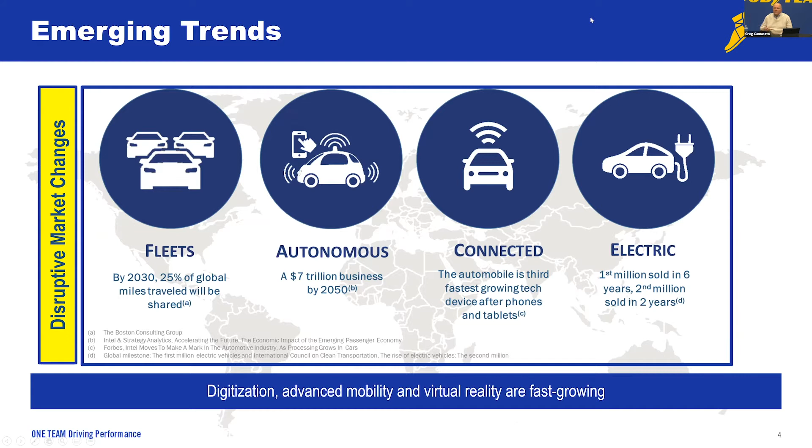Today, expectations and the reality of our development cycles requires us to achieve the necessary performance levels and the ultimate package much more quickly. There are many reasons for that, not the least of which are availability and cost of prototypes, the sharing of prototypes across development areas, and the need to respond quickly to the marketplace. Ultimately, this requires a much more efficient and agile development process than in the past.

So in times of change, in times when inflection points hit, agility is key. The need to be more responsive, be adaptive, and adjust is clear. How we develop tires and the tire vehicle package must change. So now let's take a look at how we are changing. Next slide, please.

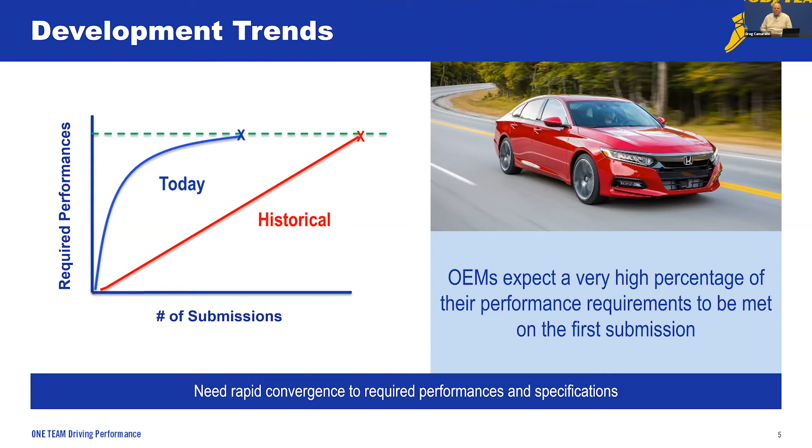In recent years, with the ever-increasing computational power and more accurate models, Goodyear is utilizing vehicle simulation environments and now even full dynamic simulators to assess the total vehicle performance. In the tire development environment, this is a major enhancement to our processes.

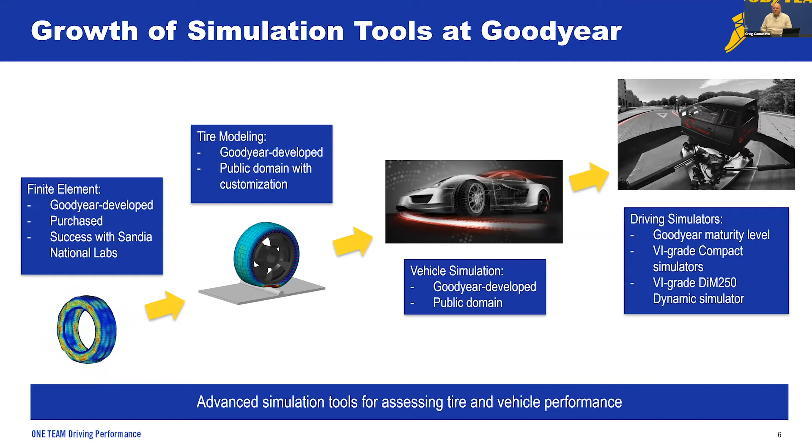So why simulators? First, our OEM customers have models representing their vehicles with a high level of fidelity. Second, through our years of development, we know we have the highest level of fidelity in our tire models. Third, we now have the ability to get a high-level representation of the track with all the physics and connections between the tire and the road.

When you bring all of this together, tires on a vehicle on a real-world track with a human, a professional trained test driver, with the ability to connect the human to the virtual using the math behind the objective representations, along with the driver's subjective evaluation and information, all brought together through vehicle simulators. We believe we are there now.

Drivers and simulator engineers can now evaluate a broader range of design parameters much more efficiently, more repeatably, and certainly much more quickly than with physical prototypes.

Simulation holds many benefits for us and OEMs, now and into the future. Although we will still require our real-world facilities, such as Goodyear's global network of test labs and proving grounds, to help further refine our models and validate the prototypes eventually produced through our virtual iteration process.

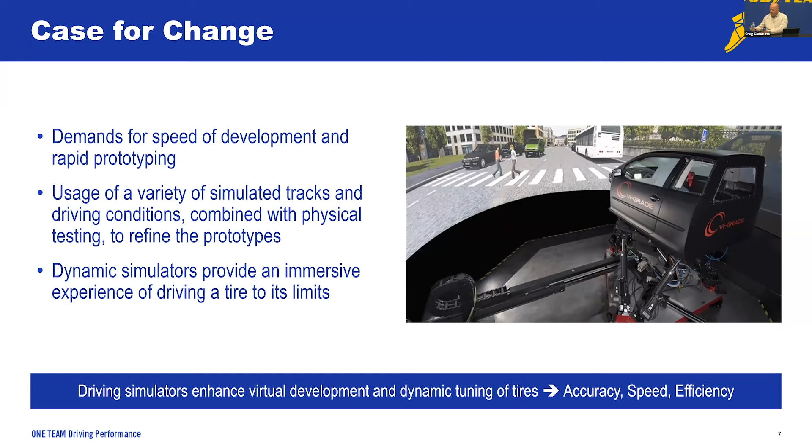In 2019, we established a truly exciting technical partnership with VI-grade. This has led us to multiple driving simulator systems, located in the US and Europe. We're very pleased to have two compact simulators, the first in our Luxembourg Innovation Center and the second in our Akron Center. We'll install compact simulators across our innovation centers.

This is the ideal tool for us to prepare models for use on dynamic simulators, allowing our engineers to quickly test new ideas and make sure they will work well when inserted into the dynamic world. We also are excited to have these simulators to further develop and test new ideas, algorithms, and new processes. It will also allow us to expose our engineers to driving simulator technologies.

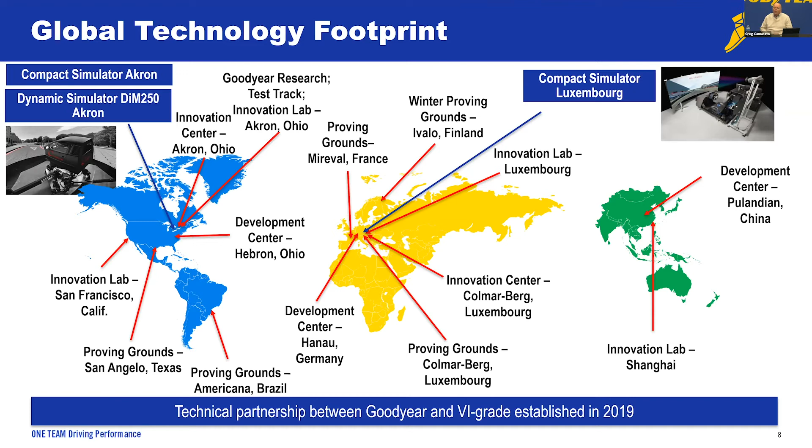We anticipate, and in fact, we fully expect this will facilitate development timing and substantially fewer physical iterations in the tire development process.

The technical aspects, you can also imagine less physical tire builds means significantly less materials used, less energy consumed, and less transportation of materials, tires, wheels, and people, and finally, less physical waste. So this is an impact from a sustainability point of view.

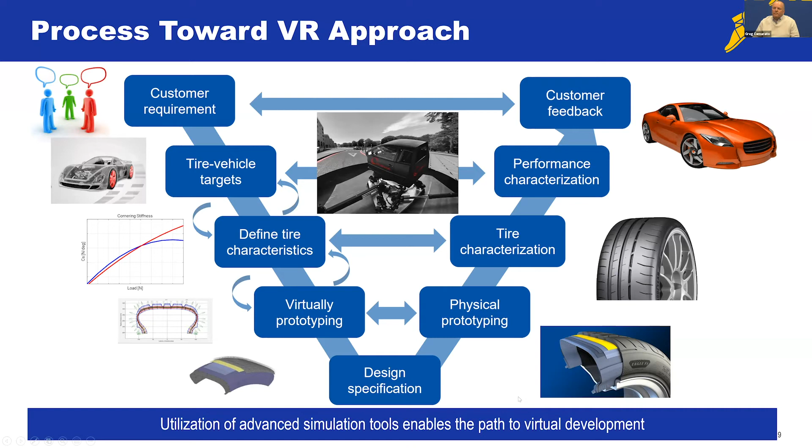Historically, Goodyear generated data from manufacturing and simulations. With more data engineering techniques, data is creating additional value in tire development, and from this, big data design can be exploited. Then with the use of advanced tools, and now including drive simulators, design space can be further narrowed down.

In the end, our aim is to do one single physical build. We have confidence in this virtual development process becoming reality with a lot from the insertion of the simulators. So now you may be asking yourself, why the confidence in the simulator during the process? Let me explain further. Next slide, please.

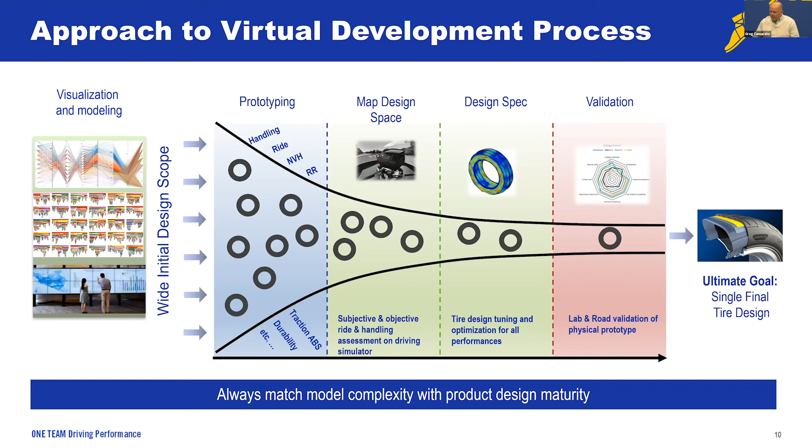Ultimately, what is the concept delivering? We knew we could get the objective information from vehicles. We have high confidence in our tire models. And as with many companies, there is a high confidence in our subjective and objective test capability in the physical world. But when we made the connection of our models with the driver in the simulator, we proved we could integrate all virtual aspects and deliver a decision that has forever been physically based.

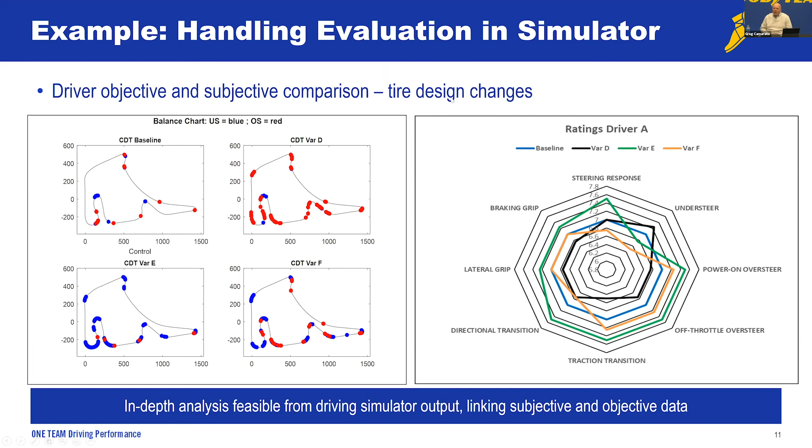When you bring all of this together, the simulation tools we have had all the years, our empirical information, finite element analysis, tire and material guidelines, standards, and experience, we can see the new virtual tire development process something like this. Now, initially, the virtual development approach will mainly focus on handling and ride performance. However, we can see expansion into other performance areas.

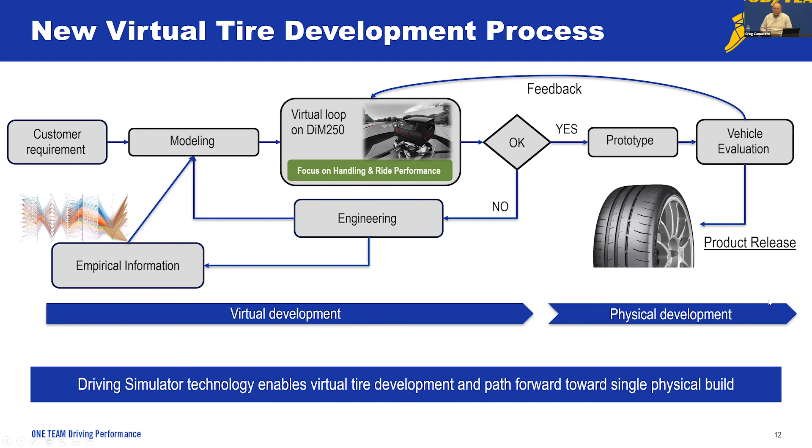Beginning with customer requirements, faster and more repeatable virtual iterations can be performed on the driving simulator before any physical prototype tire. And finally, the physical prototype is evaluated on the customer vehicle in the real world. It is also important to note the physical testing is another feedback into the virtual loop to further refine and validate the process. In essence, the goal is to achieve the sign-off or product release virtually, as with one single build that satisfies and validates customer performance requirements.

So Gabrielle, if you could stay on that slide, please. The benefits of virtual simulation can be simplified into 3 areas: 1, development efficiency and accuracy. 2, faster speed to market. And 3, future preparation and readiness.

We achieve better performance on the first and eventually only physical prototype through virtual pre-assessment. It's possible to get closer to customer targets via highly repeatable and consistent evaluations and data gathering on a dynamic simulator system. This evolution allows us to better integrate the subjective and objective worlds.

In terms of being faster, we can significantly reduce the timing of development cycles and be more responsive to changes in customer needs. And as mentioned earlier, we're able to implement virtual iterations in the tire development process.

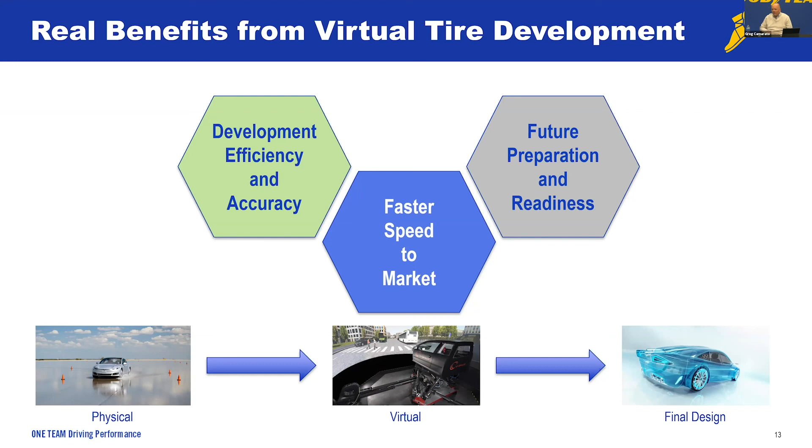As I conclude my presentation today, Goodyear is extremely excited to be part of this conference and working with a partner like VI-Grade, as the following points are clear to us. Simulator technology is truly a key enabler for virtual assessments. Increased collaboration with our customers with this type of process during vehicle and tire development will enable increased efficiency and sustainability in our product development work. Fully virtual development. In fact, virtual is becoming reality in the tire industry.